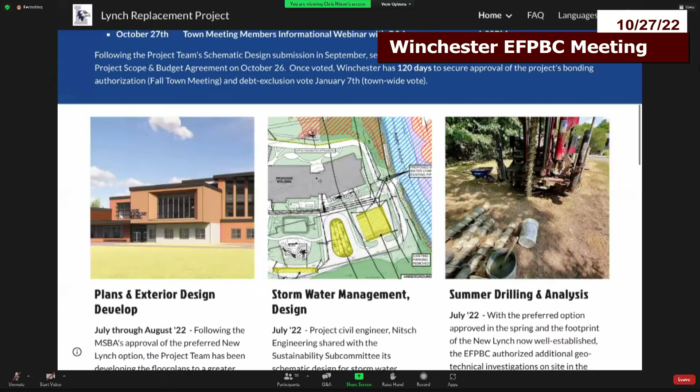As you see there, October 26th has been updated to reflect that the MSBA unanimously approved the project. Fall Town Meeting opens on November 10th, and we have a couple of articles for consideration. The debt exclusion override, as I mentioned, is scheduled for January. Charlie will get into the project schedule timeline in a little more detail shortly.

In this presentation tonight, I'm assuming that most of those watching, being town meeting members, are already familiar with the MSBA and our partnership process and why it's important. For those who are not familiar, I encourage you to go to this subpage to learn more about it. There are some direct links here to the MSBA's website.

Most importantly, the message here for Winchester is the MSBA is a very important financial partner with us in core replacement projects. We were actually notified in December of 2019, if you can believe it, that we would be entering the eligibility phase in the spring of 2020. So that's really when this process started.

On the Vinson-Owen project, which was another core replacement project, we were appreciative to get a $10 million reimbursement grant through the MSBA, and on Winchester High School it was $44 million. As you'll learn here in a few minutes, we should be receiving about a $17 million grant from the MSBA for the Lynch project.

I won't get into too much detail, but for folks who are interested you can certainly learn more about it here. I think everybody here tonight is familiar with who the SBC is - that is your standing school building committee established by town meeting. The members are listed here on the right. If they are your friends or neighbors and you have questions about the project, I encourage you to reach out to them.

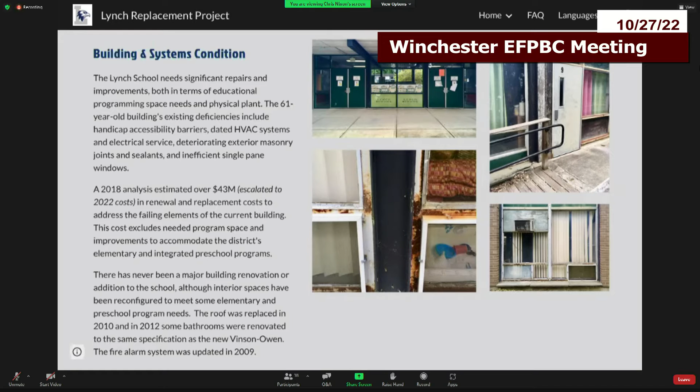We estimate that just in today's dollars alone, the cost to simply fix what's broken or breaking at Lynch would be a little over $43 million. And of course, that's still a junior high school, and it doesn't meet the program needs of the district.

We have a site page, again, that I encourage you all to visit. This is a very helpful diagram. Jay Nardone said months ago, I thought very eloquently, the Lynch site is both the largest and most restricted site the SBC has ever had to work with. It's over 18 acres, but is extremely restricted in many respects.

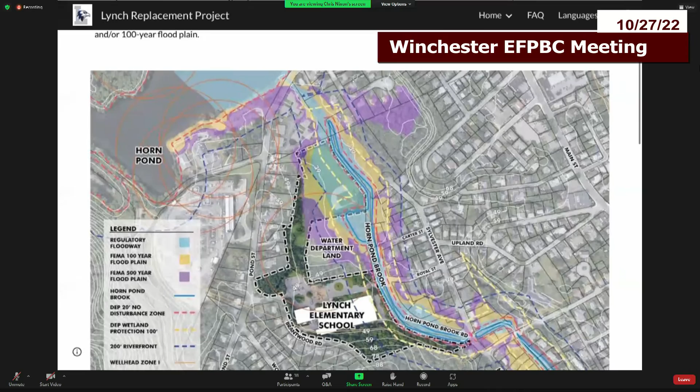Of course, we have two unconnected vehicular access points from either side of the neighborhood. We have wetlands on site at Horn Pond Brook. We've got a connection to Horn Pond that abuts the property. The site includes a large play field, and we have significant portions of the site that are either in the floodplain or the floodway. Charlie, again, will speak to this in more detail later. So it's a large site, but very restricted.

Town meeting members will remember at spring town meeting, Mr. Fallon, on behalf of the select board, advocated for a transfer of the Wellfield parcel - that's this very large, almost square shape that you see in the middle of the site. This was required for the MSBA to consider approval of the project. They want all the land necessary for this project to be under the control of the school committee.

So we appreciated that article, and town meeting voted, I think unanimously, to transfer the land. I am pleased to share that literally Monday this week, we got written notice from Mass DEP that both they and the MWRA had signed off on the abandonment of the well field from an administrative point of view. So that is yet another important milestone and was necessary for the board to vote yesterday.

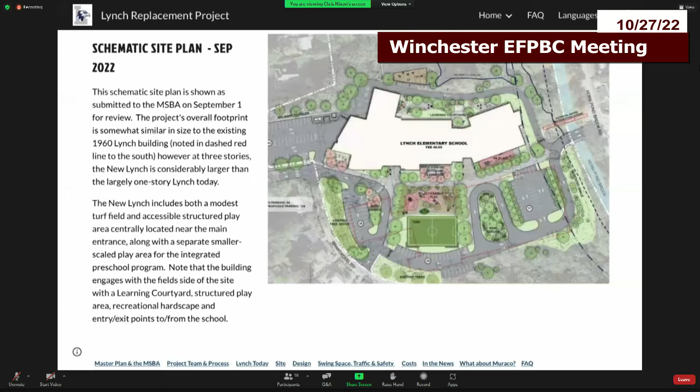We will always have on this site a very simple site plan. Charlie will go into his in a little more detail. This diagram, if you look very carefully, below the white footprint in this red dashed line, you see the outline of the school as it exists today. So it gives you a sense of how what is proposed sits on the site.

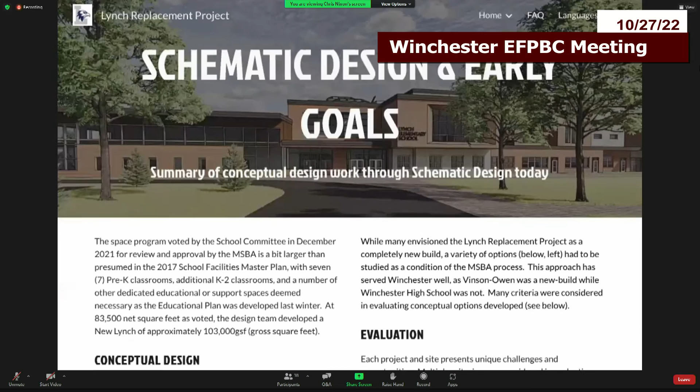We have a design page, intended to be somewhat dynamic. We describe the overall process of how we got here, the many different options we looked at and evaluated before we got to this new build option. That included renewal and replacement and many different varieties of expansion and new builds.

What we have today is a 3-story building. A very brief description here describes how the building is stacked. Simply, our youngest learners are on the first floor, our oldest learners are up on top. We will always keep a few images here as they evolve to give you some ideas of what the concepts are for the interior of the building.

We also describe some of our project goals on the design page. Our target is a LEED rated building with a gold rating. The climate action plan voted by Winchester in 2020 is a very important aspirational guide for us, and we said so in the project RFP.

We're looking to adhere to the Massachusetts decarbonization roadmap. Institutional buildings contribute significantly towards greenhouse gases in Massachusetts, and so from the very beginning, our presumption was this would be an all electric building. So we're not going to rely on fuel oil or natural gas. And that's an exciting departure from our past as well.

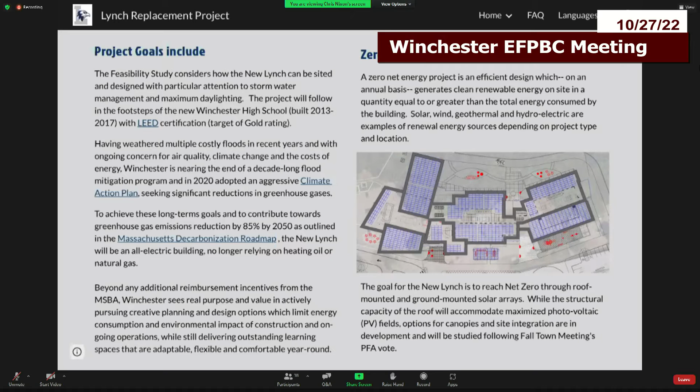Our goal as well is for a zero net energy project, meaning that we are generating on site adequate energy to meet the demands of the building. And we look to do that through both roof and ground mounted solar. Charlie will describe that in a little more detail. That's an ongoing analysis.

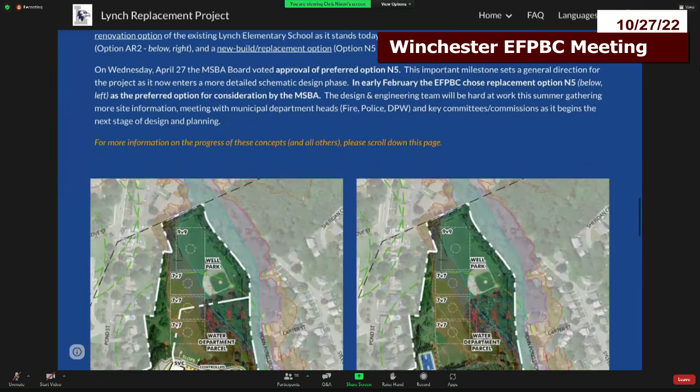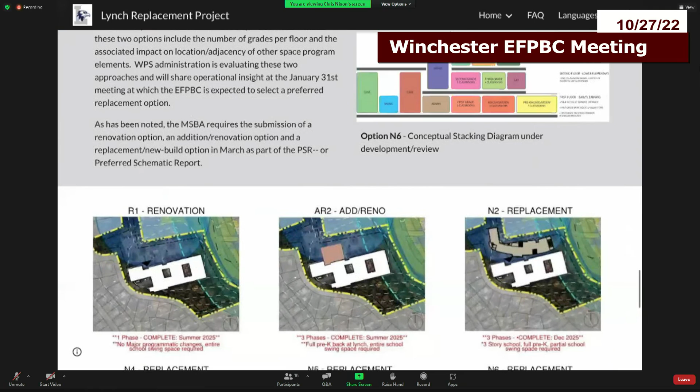For those who have some questions about how we got here, and I won't get into this in the presentation, this is much like the homepage, in reverse chronological order. So as I scroll through here, if you go to the bottom of the page, you'll find how we got from 11 to, I think, 6 or 5, and then to 4, and then to 2, and then to 1, in a very simplified format. What I'm sharing with you here are the many different options that were originally considered as part of the feasibility study. That evaluation is actually a requirement of the MSBA as well.

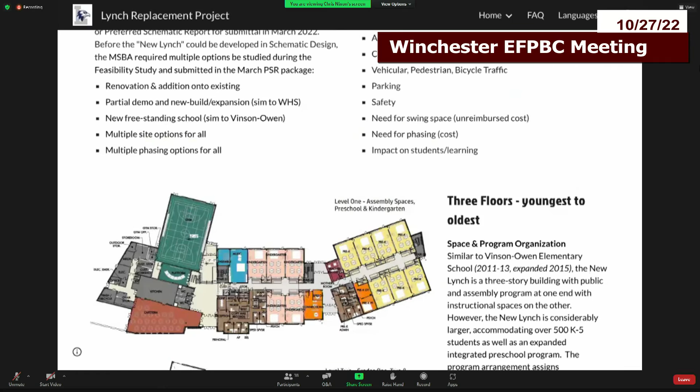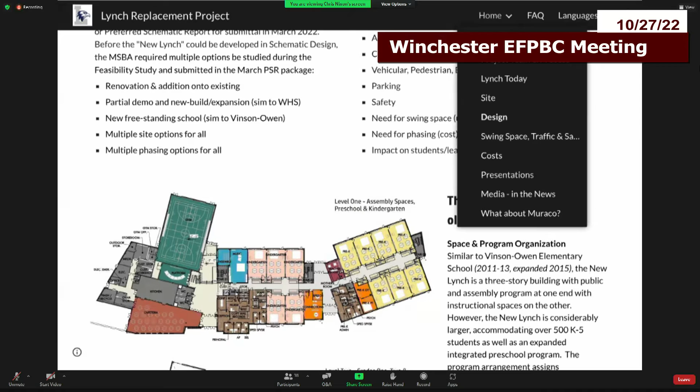So I think I'm going to pause here. I'm going to stop sharing my screen. Frank, I'll ask if you can give Charlie permission, and he can get into more about what the Lynch looks like today as we envision it. And then I'll wrap up with some thoughts on costs as well.

So Frank, can I share a screen yet? Yep, you're all set. Okay, let's see what happens. I want to go to... Okay, do we see that? Looks good. Okay, so good evening.

My name is Charlie Hay, as Chris mentioned, from Tappé Architects. I'm delighted to be here. I'm going to walk you through some of the images that have been developed for the project. Chris has talked about them.

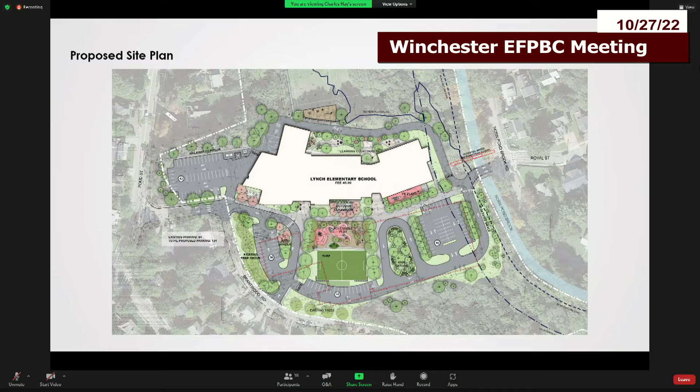So we've already begun informal conversations with Conservation Commission, and should the project proceed, those will, of course, become more formalized, and a formal submission will be made. So that's sort of the site plan.

And as Chris also mentioned, the sustainability issue, which has been kind of on the forefront of the project in terms of planning. The decision has been made to proceed with solar as a means to generate on-site energy that's adequate to meet the goal of a net zero building.

And that will take the form of both roof-mounted solar, as well as parking canopies and roof canopies. And a solar study has just been wrapped up, and it gives us guidance on how to proceed in terms of locations to some degree.

But the fact of the matter is, it won't be fully developed till the project proceeds. But the good news is, it's pretty clear to us that we'll be able to generate the kind of production on site that we need to for electricity.

How that's procured ultimately will be a decision that's made down the road, whether it's made part of the project or made as a third-party agreement, PPA, later.

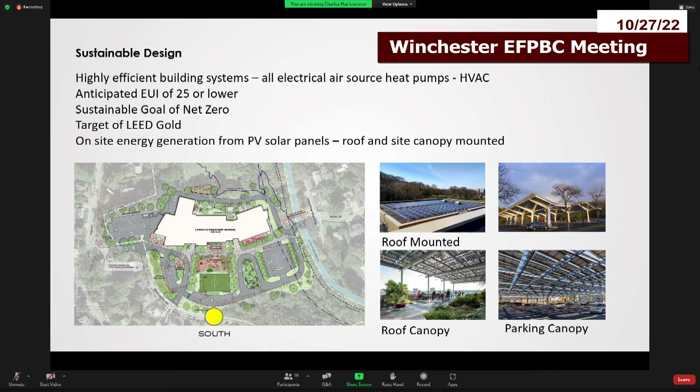The plans Chris shared with you to some degree, and there's really not time in this presentation to go into them in great detail, but as Chris mentioned, the youngest learners are on the ground floor, pre-K and K.

If you see the yellow boxes on the right, that's our pre-K wing, which is a dedicated wing for pre-K. And that has its own entrance. It also has its own administration, so it has its own controlled entrance. And students can go directly into that area and have their own separate pickup and drop off, which is great.

The main entrance is to the left. It acts both as a public entrance and a student entrance. The nice thing is we can zone that lobby and the gym and the cafeteria off really as public functions.

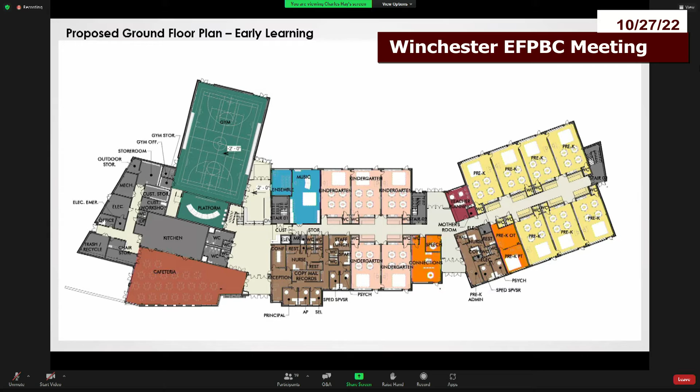That could be used evenings, weekends, and the like. And the rest of the school could be closed off, which was sort of part of the kind of mission statement of the school. And the gym is in the rear, that large green box, and it has a platform for performances and the like. Music is also on the first floor.

On the second floor is sort of our lower elementary grades, so 1, 2, and 3. First grade gets its own kind of zone, its own pod, and second and third grade become sort of a team above pre-K. This is also the floor that has art and media, which are on your left.

And again, the public could actually come up the main stair and arrive at art or arrive at media without going into the rest of this classroom wing. And so that, again, if you had a public function in the evening and you wanted to use the media center for a meeting or for a presentation, that would be, or for adult ed, that would be an opportunity.

If there's some sort of an art show that a parent wants to visit, they could come up the stairs and go to the art room without going into the rest of the building. So the public function of that main lobby is actually a 2-story kind of connection.

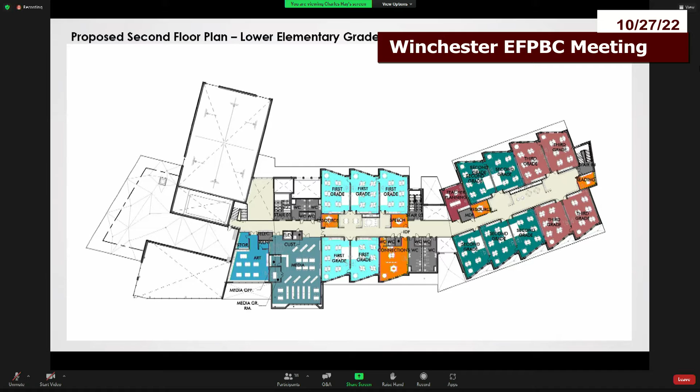Special education is in the orange boxes, and that's distributed evenly throughout the building. On the top floor, we have basically upper elementary.

The pink classrooms on the left are our 4th graders. The right-hand purple boxes are our 5th graders.

The 5th graders get a nifty setup because they're adjacent to an outdoor classroom on the roof, which will probably be covered with solar panels as a canopy, giving it some protection from sun and the like. It becomes its own little academy.

You'll see images of this in a minute, but you see those wide classrooms in front of wide corridors. They act not only as a place for cubbies, for kids to put their coats and backpacks, but also as another teaching zone where there can be one-on-one or small group learning outside of the classroom. So it gives the school some flexibility.

There's also a STEAM lab on the upper floor that will be used by all students.

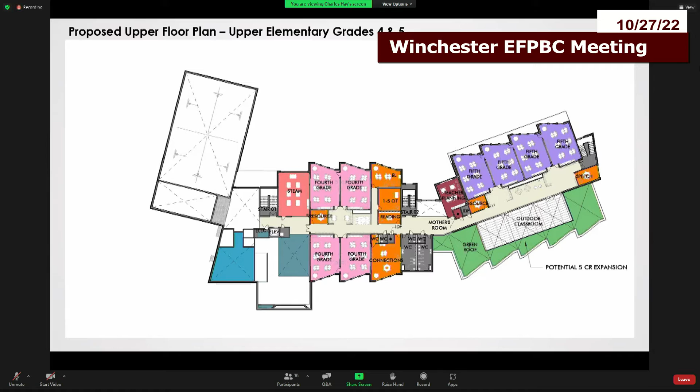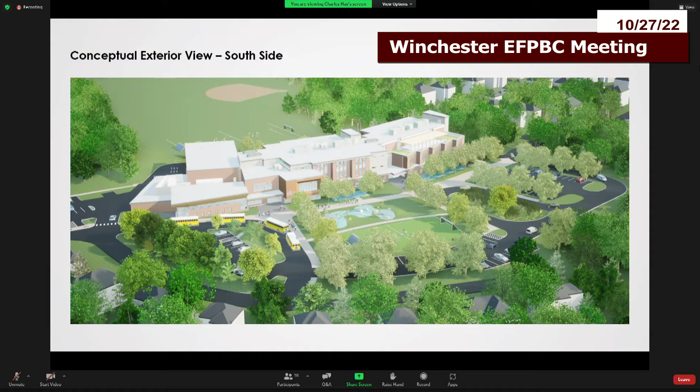One of the things we heard early on in the planning was the desire, both by parents, educators, and community members, to take better advantage of the site, connect the building more to nature, and more to outdoor play and outdoor learning. So we're hoping we can accomplish that in how the site plan is being developed.

There's another view, you can see some buses there. Here's the rear, again from the air, but you can see the soccer fields in the rear and how the building now basically addresses those soccer fields.

So the recreation play areas become much more of a resource for the school during the school day, while of course they remain for community use on evenings, afternoons, and weekends.

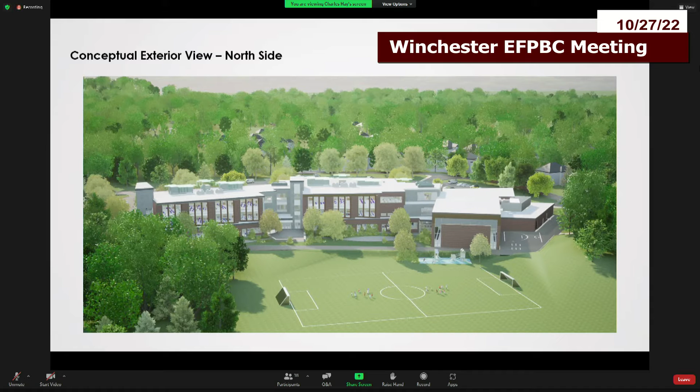There's a small playground there that can be a kind of multi-generational playground. If one sibling is playing soccer but another isn't, they could go use the playground during a practice or a game. That's kind of a neat feature that doesn't exist now. And there you can see what it might feel like from the soccer fields.

We also have some interior images. This is the lower lobby. Here you can see we're showing the existing mural from the existing Lynch as having been reproduced and placed in the new building, which might be a really fun thing to do.

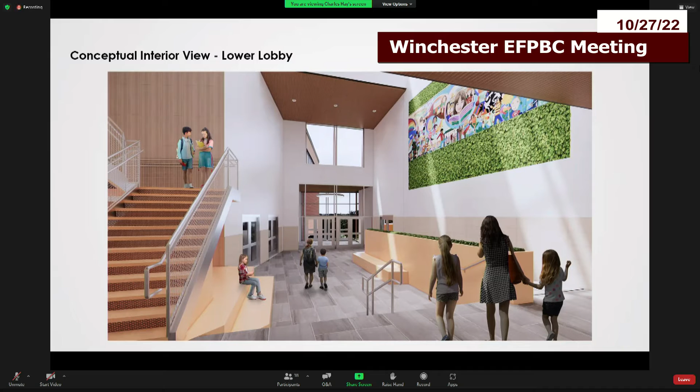This is looking out towards the rear, and there's a lower lobby where you go into the gym and there's a ramp. We're hoping to bring some greenery into the building, because of this interest in connecting the inside to the outside and focusing on nature and outdoor education with this building, since we've heard that's important.

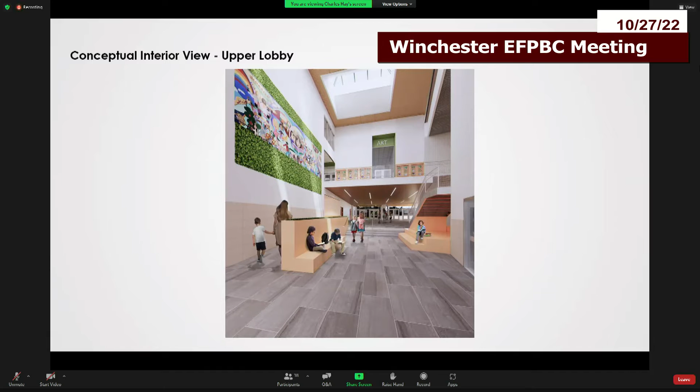Turning around and looking up, you see the art above, as I mentioned previously, the opportunity to go up there and have community and academic use.

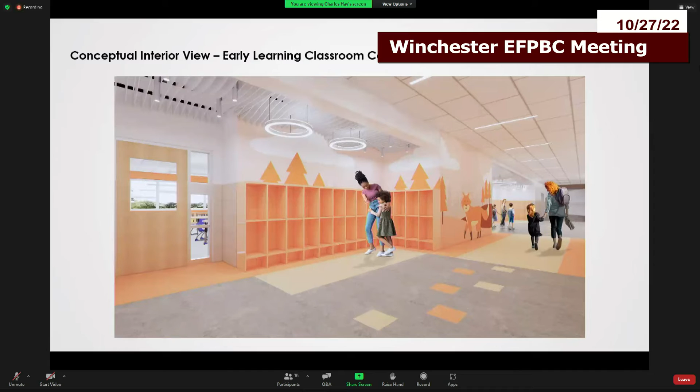This is the early learning corridor, and we hope ultimately to develop themes using color and graphics that identify various areas for students, for wayfinding, and for a sense of place and being part of one team or another within the school.

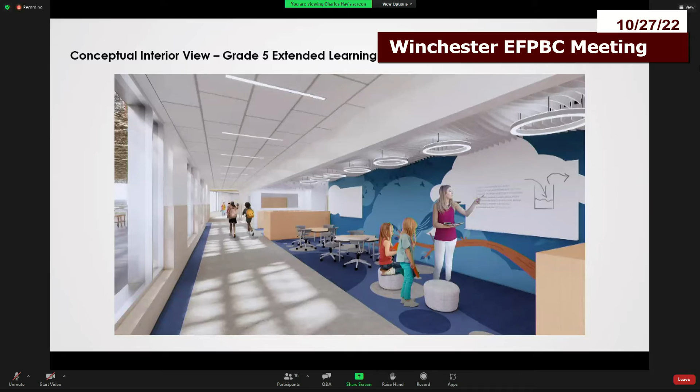This is the second floor, the same idea, but you can see this concept of having breakout spaces outside of the classrooms where students can learn, as well as classroom space, but also out in the corridors. We've done this in a number of schools very successfully.

And again, it also functions as a cubby space for students. Sort of standard classrooms with plenty of light, plenty of teaching walls, and plenty of storage. And that is sort of the kind of images we've developed so far.

If that's the case, construction would occur in 2024 and into late summer of 2025, so that the new Lynch would be ready to be moved into late on, September.

As you probably most all know, the intent is to move students out of the Lynch and off-site during the course of construction. Students will be relocated to the Parkhurst site for the extent of construction.